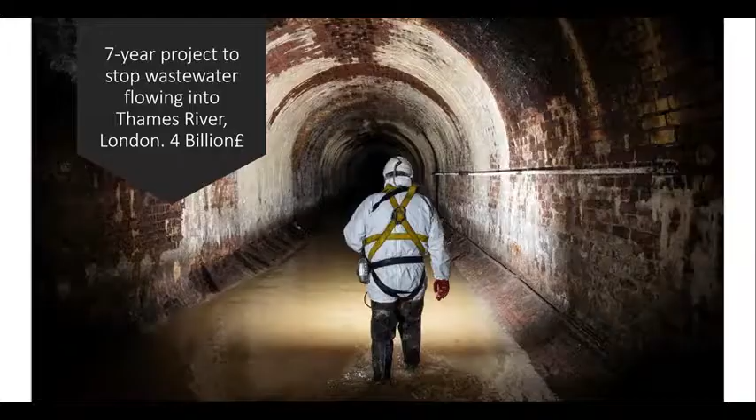The Philadelphia approach tends to be more successful. However, in large stormwater volume scenarios, the London approach is more feasible. The picture here depicts the London Thames Tideway Tunnel, a 4.2 billion pound sewer redesign. Again, with the London approach, you can either redesign or you can add supplemental GSI.

So on the cheaper side of the house, which is more appealing to me because I am on a college budget, Philadelphia has taken the minimalist approach to handling its combined sewer overflows, which is supplementing the capacity of their existing system, and they're doing this through the use of GSI.

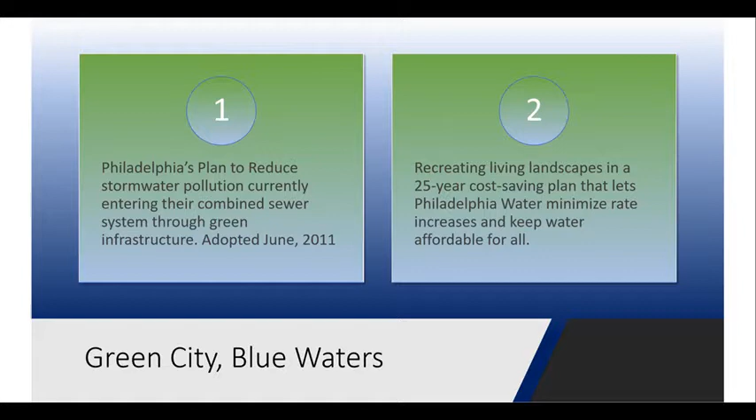Green City Blue Waters is a 25-year cost savings program that uses GSI as a vehicle that drives a reduction in overflows entering their local water bodies by 85%. As we engineer towards the Sustainable Development Goals, our objective is to meet these goals in an affordable manner, which makes GSI much more practical than sewer network redesign in most cases.

I want to bring you all home here to Vermont, which is a small rural state in America with less funding than larger cities. Certainly addressing surface water quality by targeting combined sewer overflows does not have the same funding as these larger cities, so GSI is much more attractive in places like Montpelier. GSI seems to be becoming a very growing trend in Montpelier's sewer management, actually. And being a combined sewer overflow community on the Winooski River, GSI helps keep the stormwater out of the Winooski.

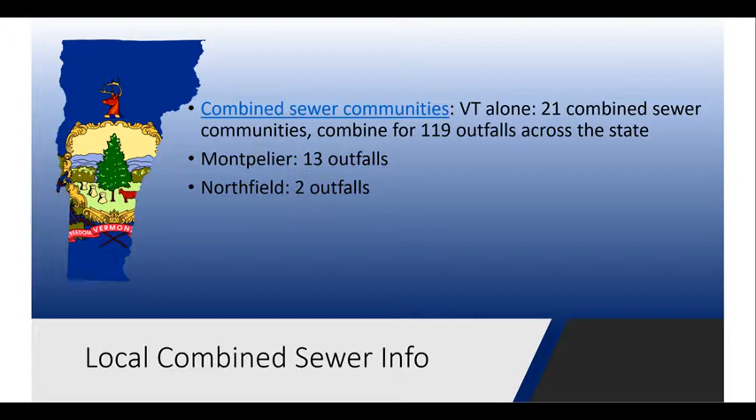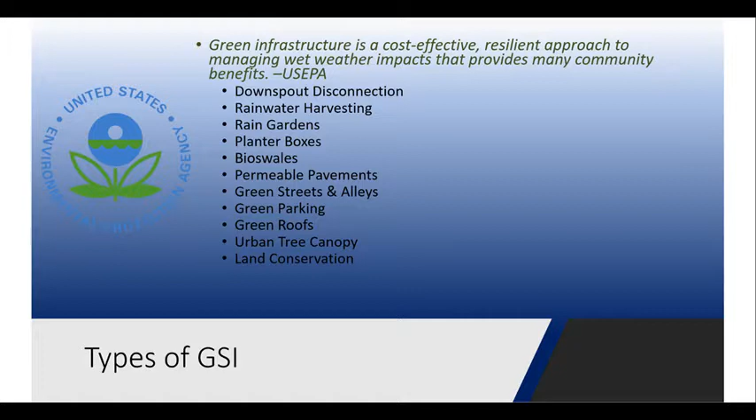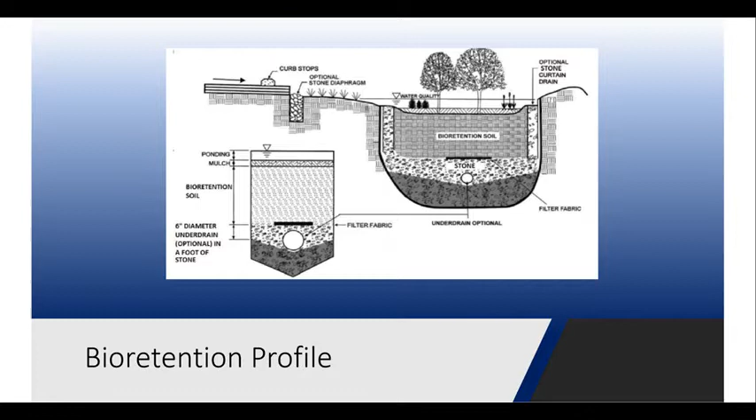So I spent a fair amount of time researching the volumetric and pollutant loading capacities of bioretention this summer at Norwich under the direct supervision of Dr. Tara Kulkarni here, and found that bioretention can generally handle the water quality volumes with upwards of 90% removal of total suspended solids and upwards of 80% removal of total phosphorus. And when I was testing, I was getting complete 100% TSS and upwards of 90 with total phosphorus when I designed in accordance with the 2017 manual that Vermont put out.

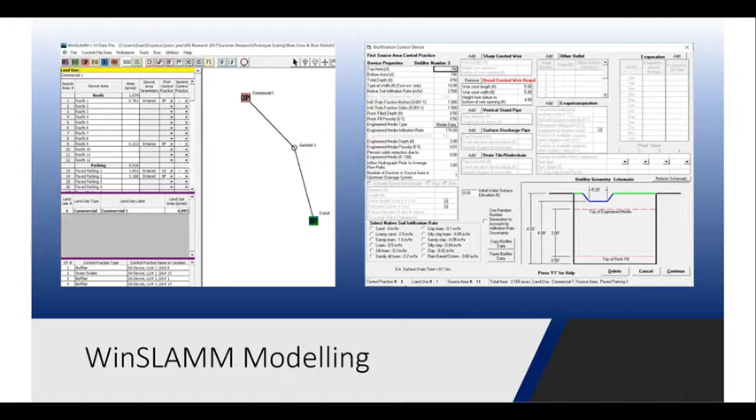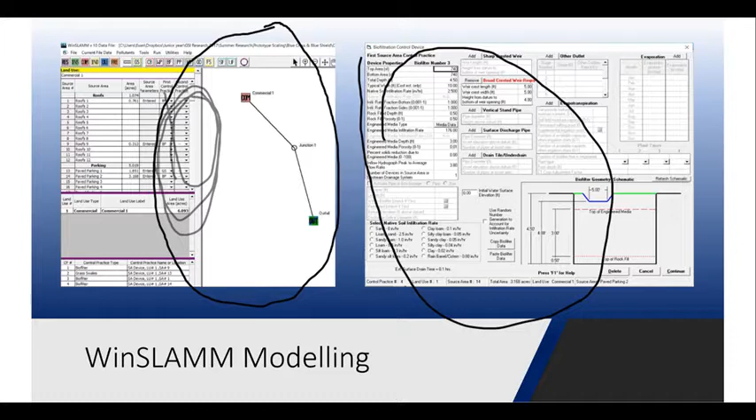And the way I assessed decreases in annual volumetric and pollutant loads was through WinSLAMM stormwater modeling software, which is depicted here. I've got a screenshot of the profiles where you design bioretention. That's right here, this big one, and this here is the general site portal. You have all your different land uses on the left. All this area, lovely graphics here, I know. And you have your commercial site, your junction to your outfall. And what WinSLAMM does is it helps you understand your site performance at the outfall, and it helps you to design and see how GSI does on that site.

In closing, I'd like to summarize the connection between increasing trends in annual rainfall, increase in impervious surfaces, obviously CSOs and SSOs, economic interests, and then narrow down to the obvious result. Put GSI in, and it makes it all easier. It's cheap. The CSOs and SSOs are mitigated, and it really tackles the issue of increased rainfall and greater impervious surfaces.